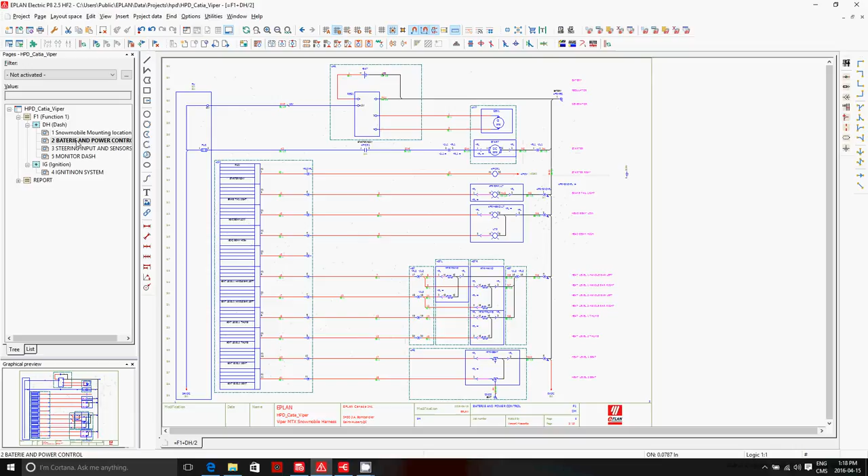Let's start. First, we have to create the schematics. The schematics for something like a snowmobile can have different looks. Here, for instance, we have a typical left to right look where we have the fuse, and let's concentrate on something like the cutoff switch and high beam, low beam type of switch that is actually on the handle.

So every area of the machine was identified, like here ST for steering, STL for left, STR for right on the steering, and every object inside these structure boxes are automatically assigned or reassigned to that particular physical location.

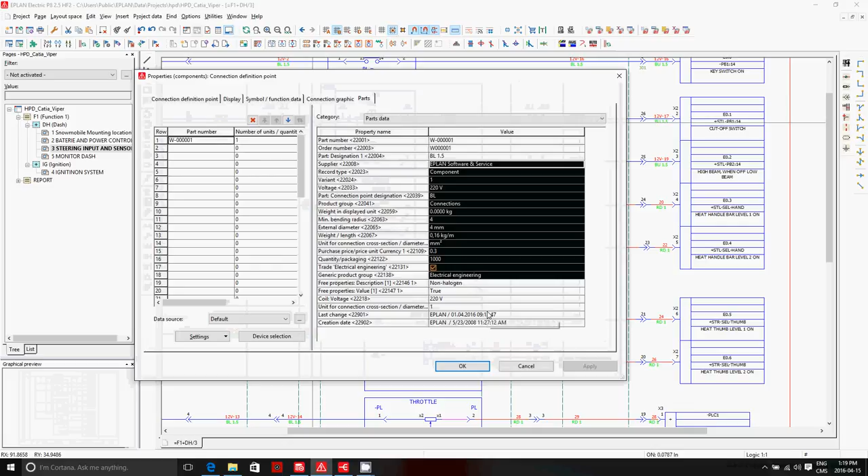So here we have a wire. Each wire has a part number, so we know the size of the wire, the gauge of the wire, and the color of the wire, and then we have connectors. These connectors, like every other connector, have a part number.

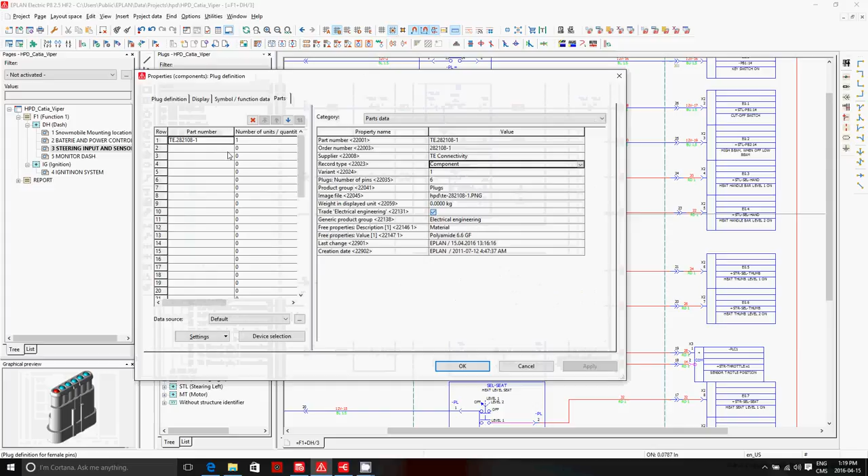Here we can see we have a plug, and you have the counterpart, which is on the other side, the PL1, which is the female portion of that connector. So of course they have mating parts, and this is all described in a library. We have these two connectors and the different details about each of these connectors in terms of mating parts, what kind of cavity pins or wire pins. Everything is defined in this library.

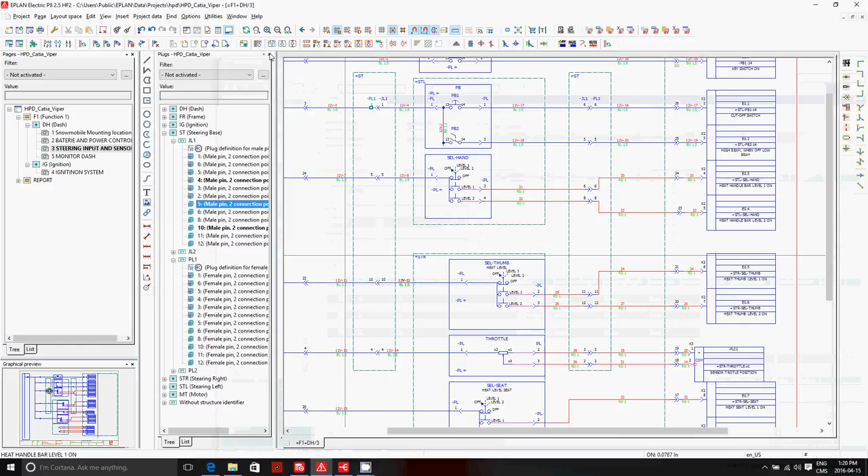Going back to EPLAN, we also have an interesting option for drawing the schematics themselves, because in EPLAN, every time you place an object, the wires are actually smart connected wires. These objects, if I unplug the smart connect, there is an auto connect that appears. We already have the possibility in EPLAN at this point in the electrical portion to have a device tag list, a wire list that can be generated in form of a report.

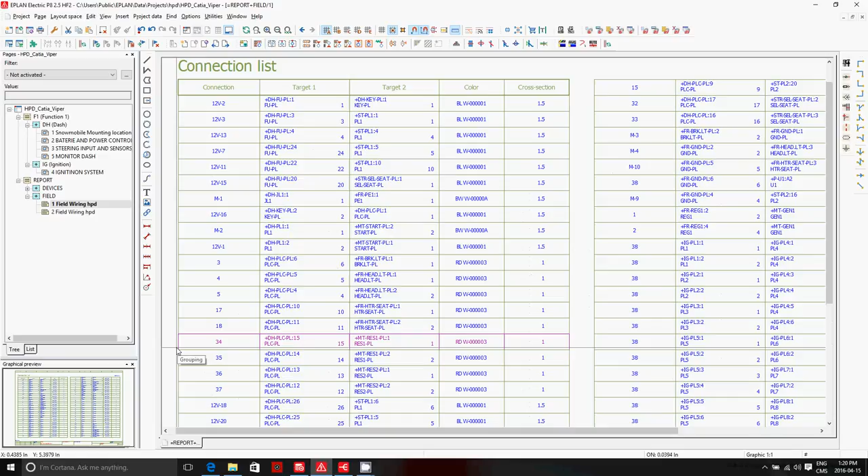And these are the two primary elements that are interesting when we go to the harness world, because they have to position specifically these connectors and specifically also these wires.

But before I continue, I'm going to show you an interesting feature called the project option. Opening this navigator, which is the options navigator, I can predefine certain options that have some inputs and outputs, and if you uncheck them, some sections of the schematics may disappear or be turned off.

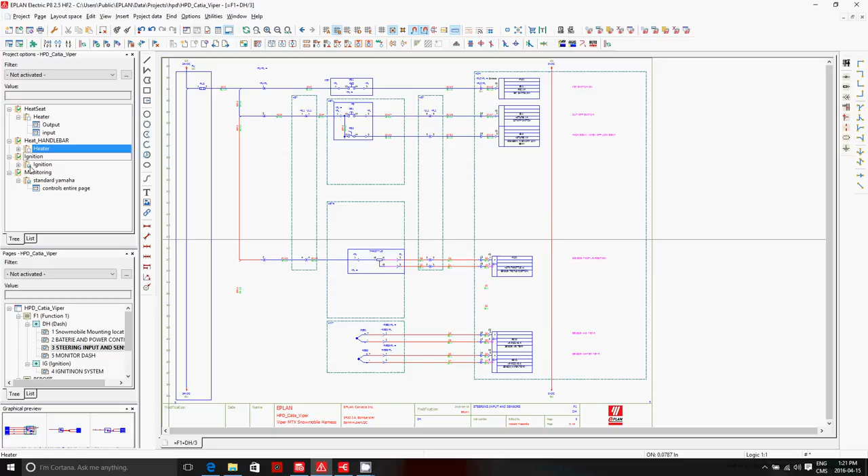And this is true for multiple different pages or entire pages all in all. So if I take a snowmobile with no options at all, the number of schematics I have is of course a little bit less. It's a little bit easier for our exercise to understand how it works. Let's concentrate on this particular push button that is on the steering portion left, and let's move on to the harness side of things once the design has been done.

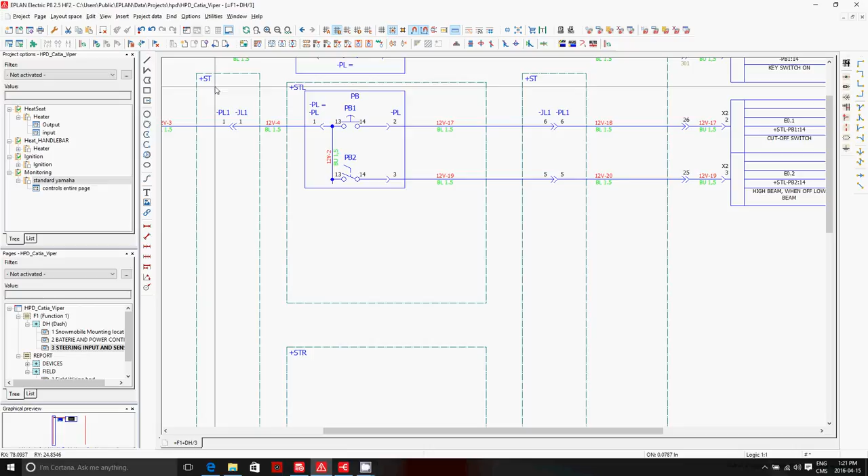Of course, all the features of the Electric P8 do apply here, and now we'll jump over to the harness section. So in the harness section, the first thing we do is import the 3D model, so to say, from tools like CATIA or any other 3D system, and then we are placing these individual connectors.

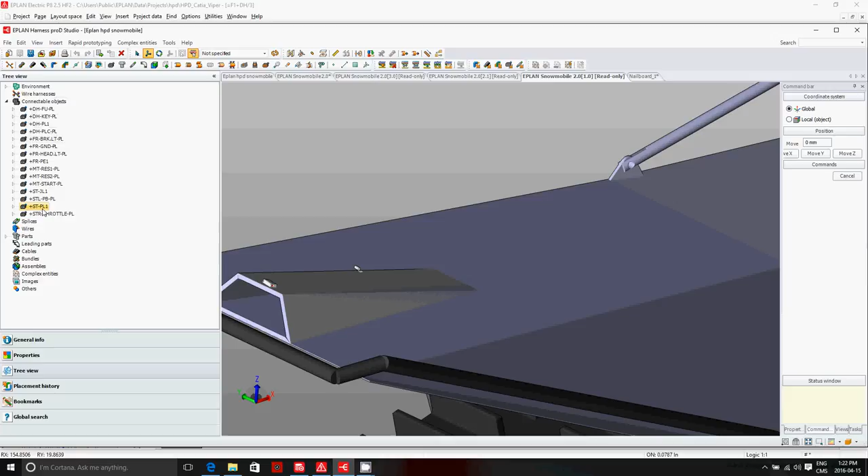So if we concentrate on the STL push button that we were looking at, and try to find it on this particular one here, we can see it's tagged up here, sticking into this portion. This model is not a perfect model coming from the manufacturer. It's one that we recreated to be able to position these connectors.

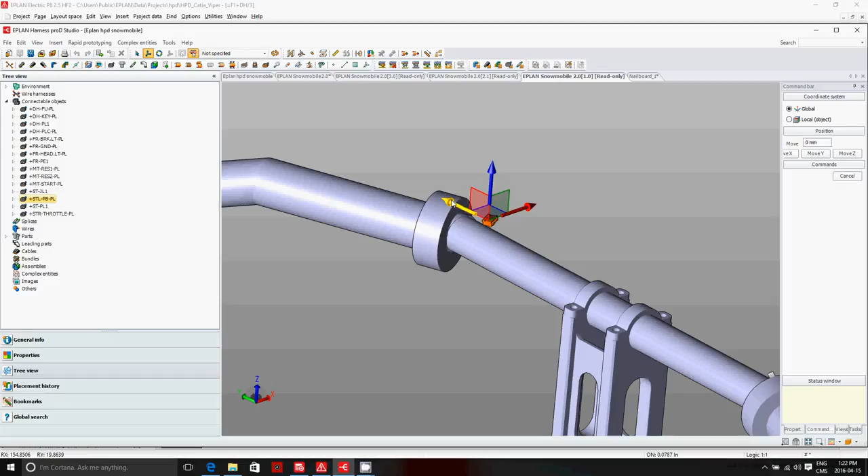So that's the job number one we have to do. You want to move them, with all kinds of different 3D objects or movement possibilities. You can rotate, etc. It's quite interesting how this 3D model works.

Now the second step we have to do is to define different wireways. In this case here, we can look at wireway bundles that were positioned for the harness that goes to the steering left and right.

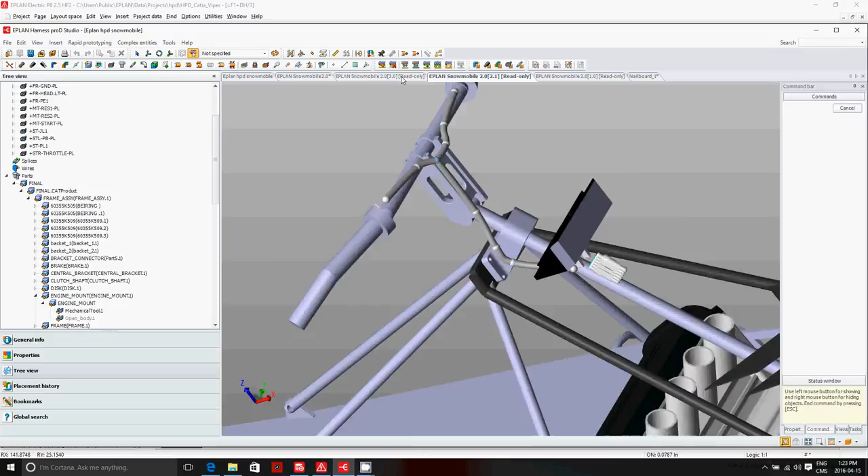The step behind this is to actually add the wires. So now the wire information knows that we go from one connector straight up to another connector. But of course, this is not how the routing will be routed.

So the final step is actually to run the automatic routing, and this creates complete harnesses like this. Here we're looking at a harness with a specific bundle section.

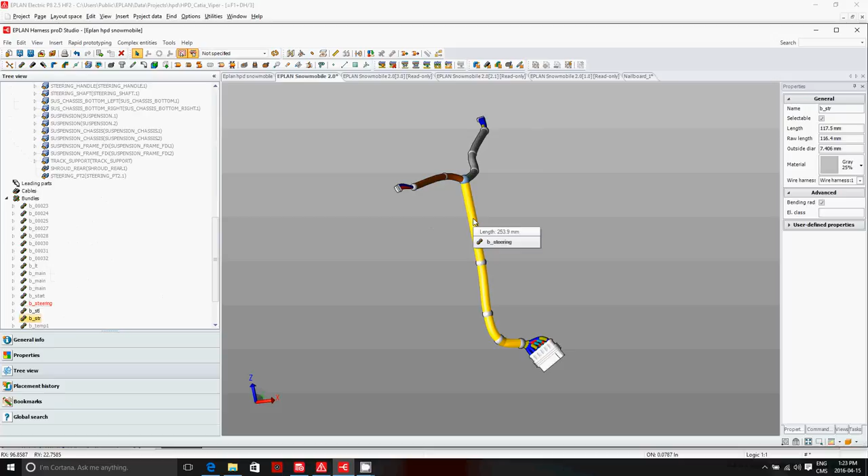And if you want to see the other harness that we also created, we just have to turn it on. We can show it here. So here we have the other portion. And this, of course, is on this assembly that I can also show, on the whole snowmobile here. So you can see that it's all positioned in place there.

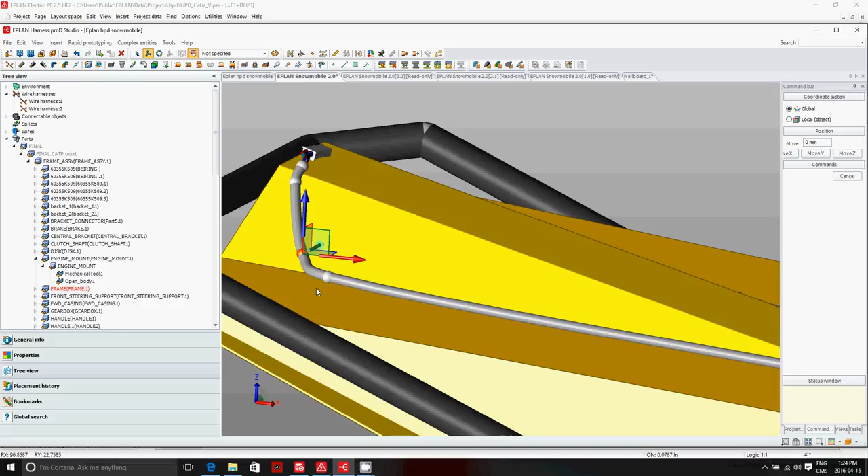And if you have some of these bundle sections you want to move around, you can easily just move them around, reposition a little bit, recurve it. And by doing so, you are actually changing the shape of the harness itself, and indeed also changing the length of each individual wire that is inside.

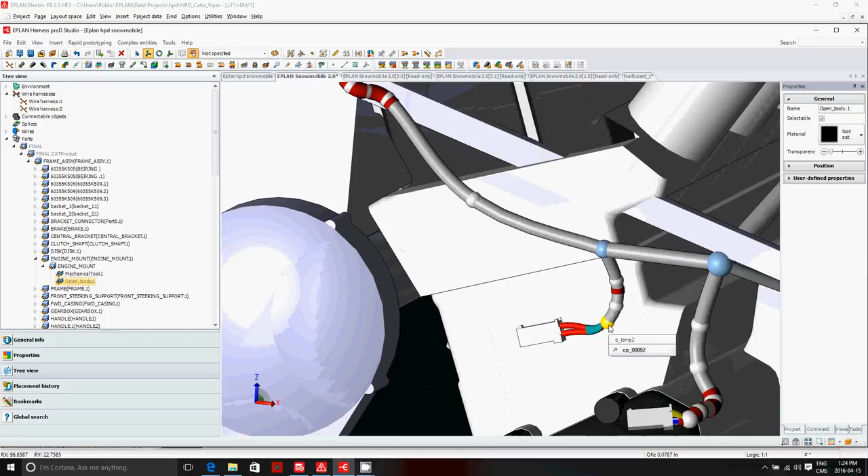Another thing that we can see here, let me just take off this hood. We can see when we get closer to areas like these where we have restraints because it's rotated a little bit too strong. So you can actually work on optimizing the bending so that, this is better.

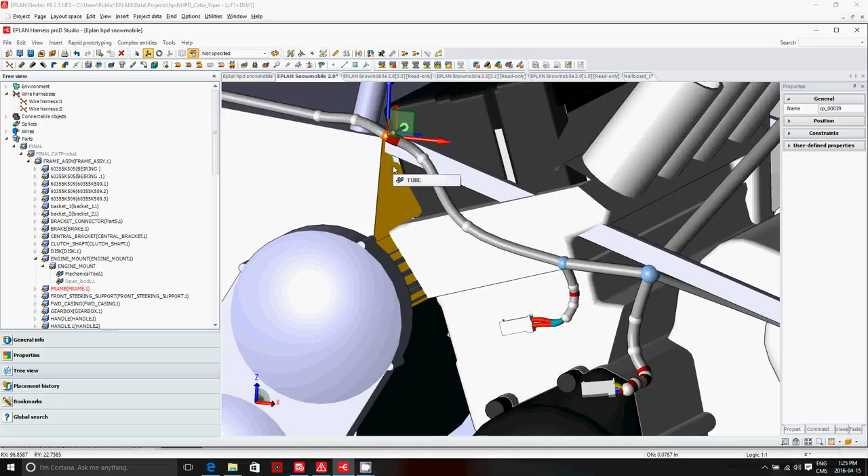As you see, we actually eliminated the red portion of it. So here we are a little bit too squeezed, so we have to move our control around a little bit so that we don't have that much. Of course, we can't go inside, but we have to see where we can move it around the components that we see so we don't have these areas anymore. But I'm going to come back to this and fine-tune it.

Because the most important part is that once you actually have this 3D model, EPLAN Harness proD is capable of creating a nail board. Now, nail boards actually have a specific feature. They flatten out what is done on the 3D to actually put it on a nail board.

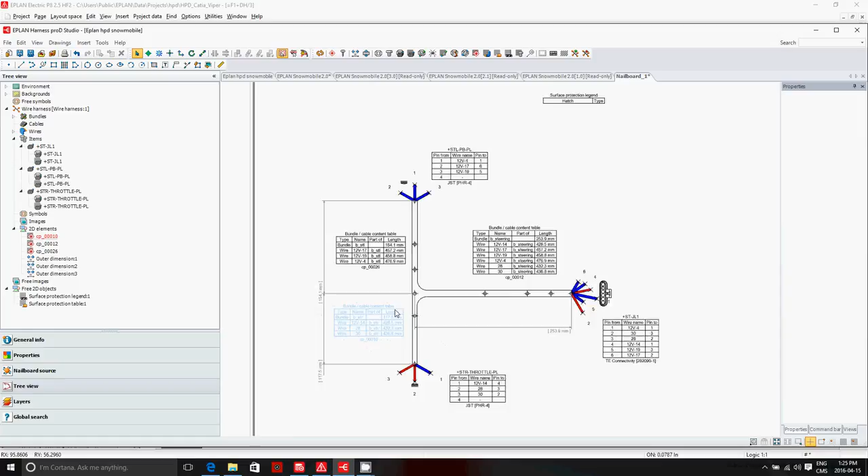And then, well, it comes with some documentation information, such as a title block you can place. You can insert automatically some bill of material. That's basically just a table that you can spin on here. You can add a wire list, a detailed wire list.

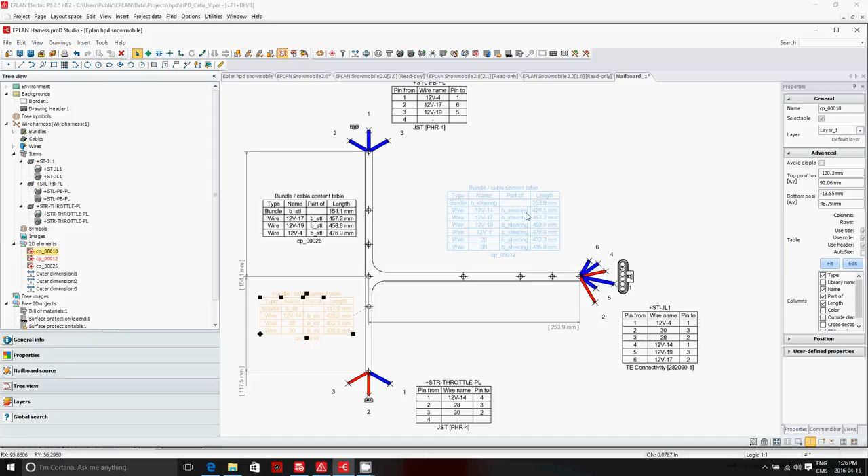In here, you can see that we even have individual wire lists for what goes in this bundle or in this bundle or in this bundle. These individual tables are all updated automatically. So of course you will find wires here, up here, and here that are the same, because at one point in time not all wires go through all bundles, and some of them do go through the different bundles. And these tables are immediately updated automatically.

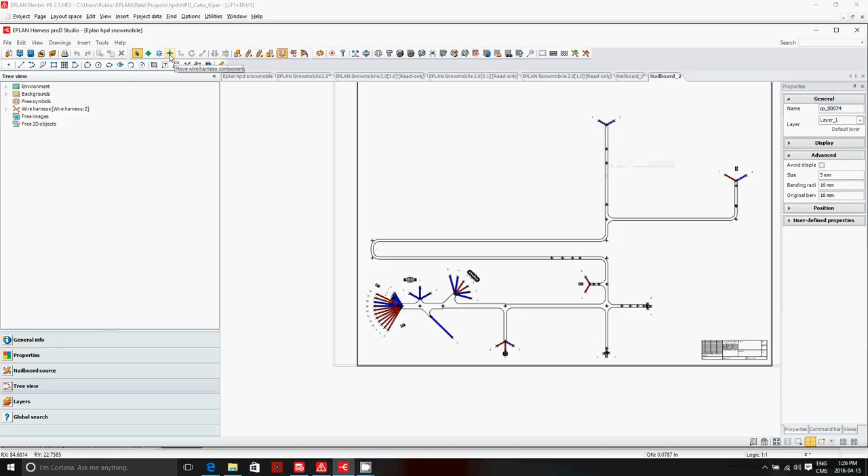So if you do change something on the 3D aspect, the length here is always calculated 1-to-1. It's flattened out. And if you need to have a more complex nail board, like this one here, where the wire is actually longer than what is allowed, you can rotate and get around like this, and control these individual points by simply rotating them around.

Now, that was one I did not want. Let me just undo this, edit here. Let's just undo the last one.

And what you can now do is, of course, put some more details. So one of the details that we like to put on there is a so-called connector table, right? So we have for each of these items - I'm just looking and giving you an idea of all the different items we have here, so you can place them individually, right?

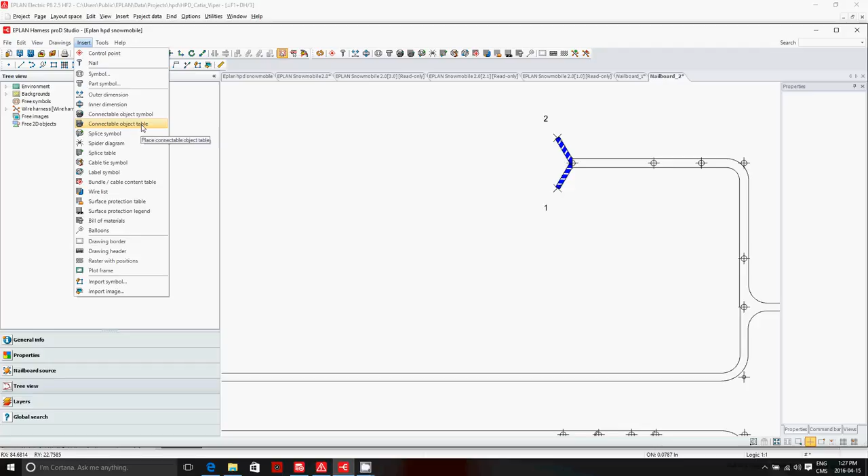And you can place them through here. And what I want is, of course, a small connector table that basically will tell you what is actually on this connector. So I can go on and on. This one here doesn't have it, so I just mark it up and say insert please a connector table, and you just place it wherever you want.

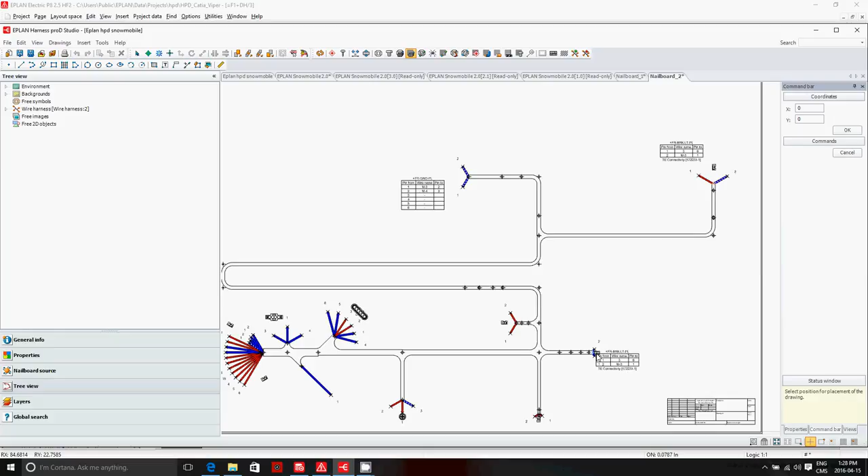Now this connector table is nothing else than the connectable object table, and you can just choose whichever you want and place it wherever you want, right? So the idea is simply by putting more detail. If you want to put this one here, just go ahead, place it right there where we have some room. Let's zoom in just to show you a little bit better how this works.

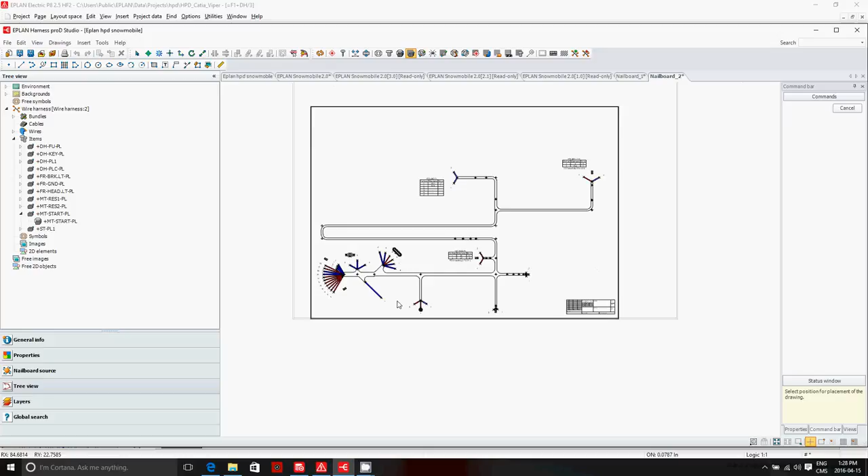So this one here, I want to place it also, let's say here. There we go. We move on to the next one here. We pick this connector here, perfect. Where do we have some room here? No, why don't we put it up there, right? Next one, etc. You can see it's very easy.

If you want to have a wire list, a general wire list, you do the same thing. Insert a wire list, there we go. That's the whole global wire list for the whole thing. You want a bill of material - in this case, I think that a bill of material will fit, but most likely, well, it fits here. It could have fitted up here, and it's always updated.

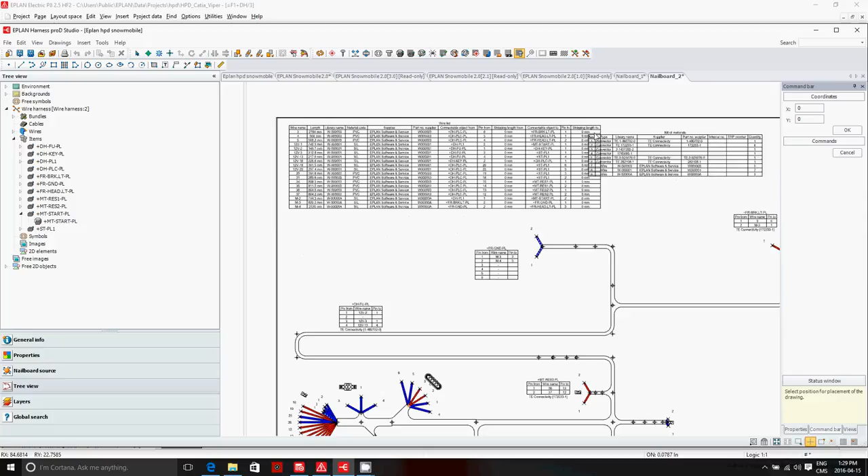So once you actually have your frame, you can always come back and fine tune it. You can put some dimensioning, although the idea behind this is to actually place the strategic nails, knowing exactly where you want these objects to be placed, right?

So if you have a control point, let's say this is your control point, and you want to add a nail for this control point, the interesting part is that, based on these control points, if they move on the 3D, the nail will move with it. So that's the nice portion of it.

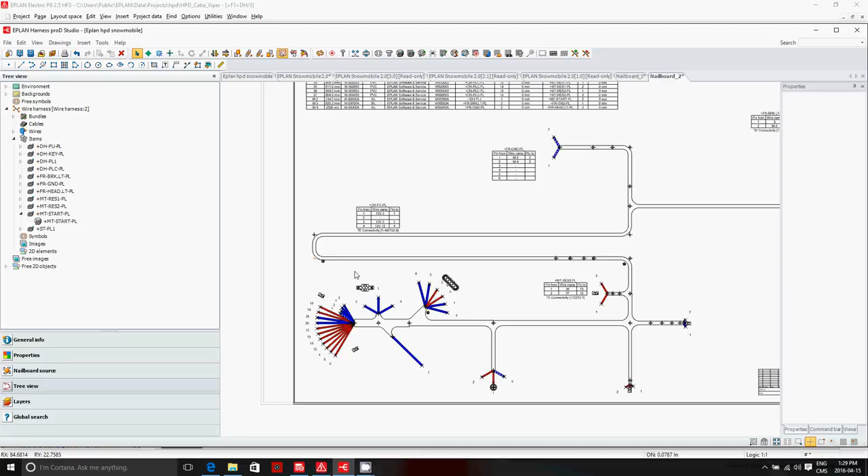You can of course leave it up there, and the guys will put their nails by themselves. These are just tricks and tips that you want on top of it.

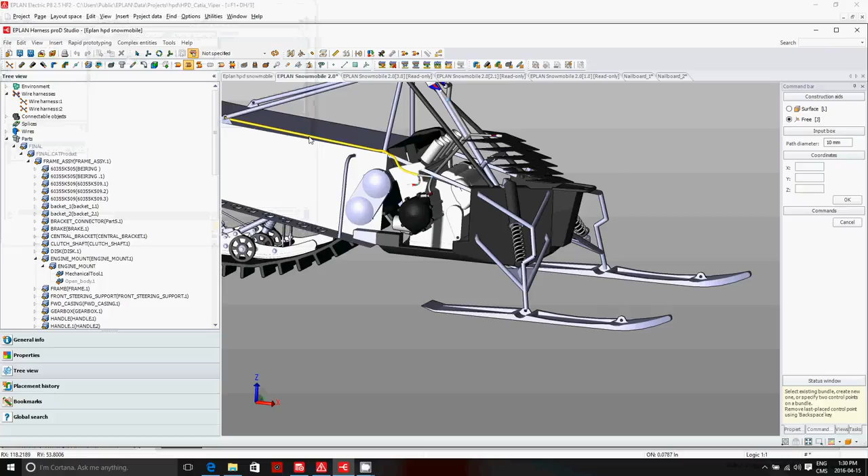You can, on the 3D model, now decide that you want to change, let's say, some of the surfaces. You can assign different surfaces, protection surfaces - we call them here wrap tapes or looms - that you can place for each of these. So you just have to pick which one you want, and you just assign it to a specific one. The color, of course, changes. That's all controllable. And once this is changed, then on the nail board you'll see the reaction.

This is a very nice way of handling your harnesses. And at the end of the day, if you wish, you can actually take this drawing and export it as a 3D model, give it back to your mechanical guys, and they will actually see where your bundles go through, if they have to put some holes in certain walls or whatever.

So you let the mechanical guys work on their 3D model, you take it over, and you finalize it in EPLAN harness.